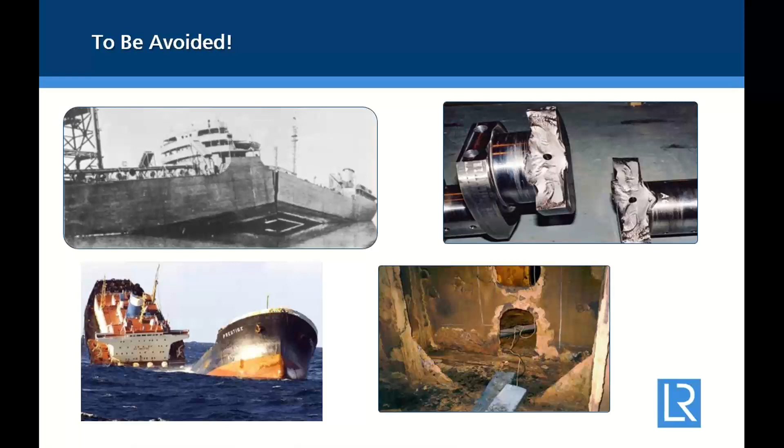Away from the home dock, you can see this collection of photos - they're not all directly casting related, but it does show you what can happen. So ships sink. It's a sad, unfortunate fact. Accidents happen. They may have human factors involved, but they may have mechanical factors. And we want to minimize, if not eliminate, the mechanical factors of failure relating to, or under which we can control the manufacturing process, to provide an approval system that's robust to give us safe ships and therefore safety of people.

So just a bit of history here. I appreciate you might enjoy that. I've even got a historic ship tie on tonight with some 17th century, 18th century ships on.

So Lloyd's Register was formed in 1760 and then it became a class society and has evolved over the centuries. It started off in a coffee shop. I wonder what the coffee was like at the time, but yeah, no cappuccinos, I assume.

But so quite a setup, very long standing, and now we have class societies around the world doing essentially the same job, which is basically to get these manufacturing approvals and other control systems to support the marine industry.

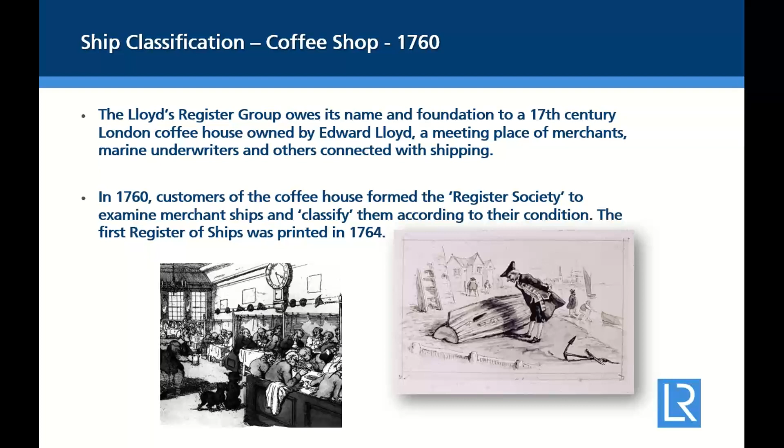So the Lloyd's Register is part of IACS, or it's sort of under the International Classification Society system. So we're one of the main members, and then we liaise and we implement IACS policy, and we contribute to the IACS sort of technical pool of knowledge, and then we discuss and develop rules and systems from them or under them or in conjunction with them and other class societies. So it's quite a complex system, but it has got a certain robustness about it, and this doesn't just cover castings.

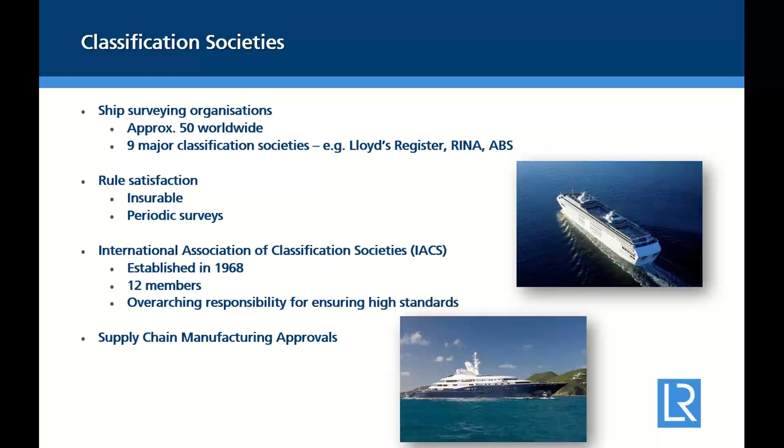It covers steel plates, forgings, pipes and tubes, proving establishments, a whole range of products. So I'm not going to list those other products because it's a bit beyond what we're going to discuss tonight.

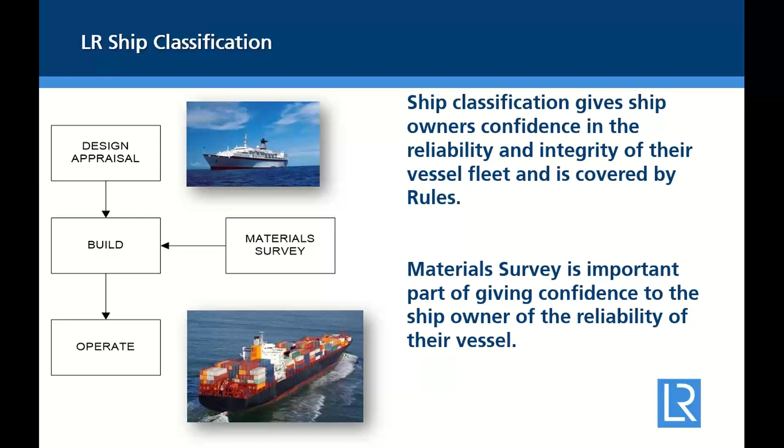So with ship classification, there is this sort of design appraisal, a build function, an operate function, but a critical part of that is what we call material survey, where we oversee the manufacture of the material and then into installation into the ships in the yard, and also for its maintenance thereafter. So this is just a sort of schematic of how that material survey system works.

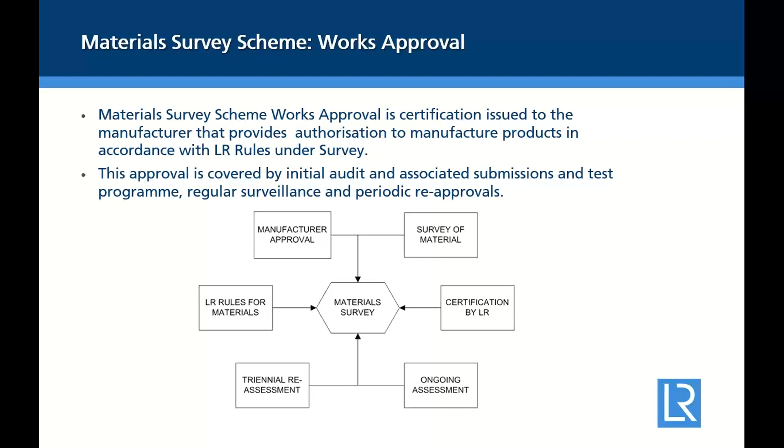So you've got a whole number of functions here. You've got the material survey of the material going into a foundry, also a forge, for instance, or a foundry. Then we've got the survey of the manufacturing process, and then we've got the certification by Lloyd's Register when that product is produced under our approval. And then we have a regular triennial reassessment, and then that needs to be sort of agreed every 3 years for you to continue to have your approval certificate. Again, I'm just throwing you diagrams at the moment - it gets a bit more interesting with photographs and see it in the context of tests and things.

So that says essentially what we've just gone through. We've got material survey, we've got manufacturer approval, we've got the rules - I'll explain that in a moment - and then we've got certification by Lloyd's Register.

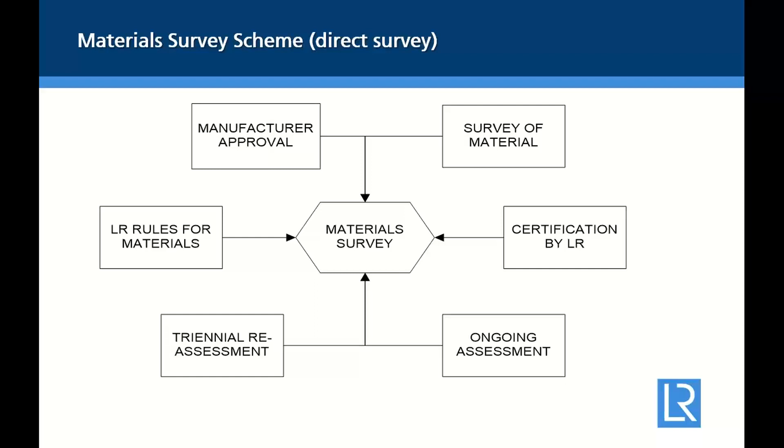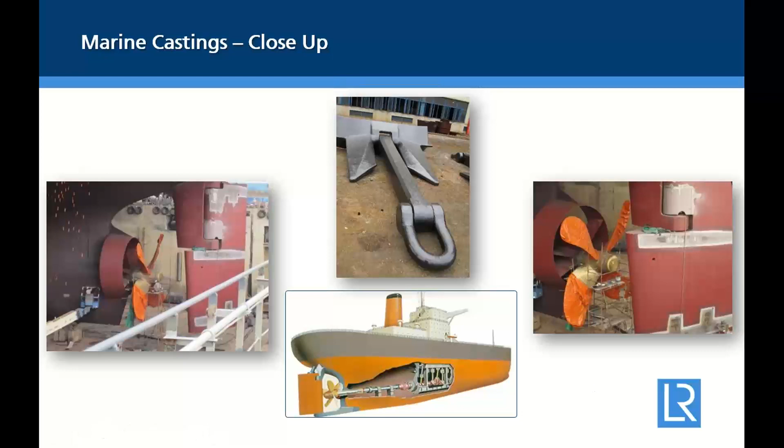So for an application, for an approval, we are looking for essentially 2 key factors. We need to know that the company is capable of manufacturing the part, can satisfactorily inspect it, and satisfactorily test it. And then we also want to know that the quality of the product is compliant with the Lloyd's Register materials rules, in association possibly with an international specification or a defence standard.

So if the material casting alloy is not in the rules, for instance if it's a nickel cast iron, then we would assess the approval to an international specification.

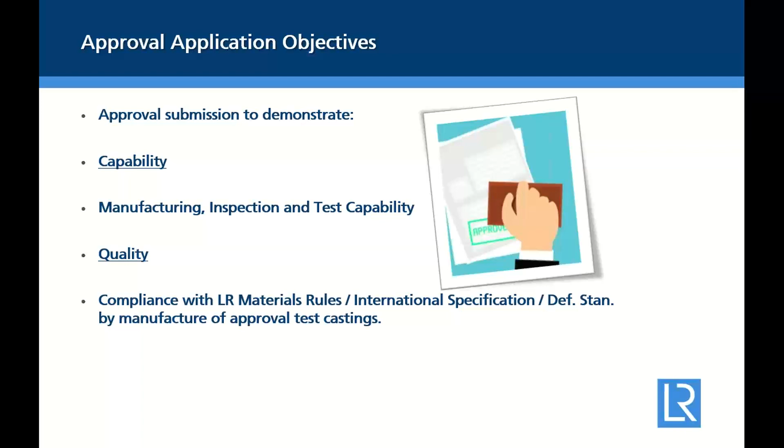Now, it's important to meet the surveyor. These surveyors are engaged throughout the supply chain, at the foundry end, at the shipbuilding end, at the steelworks, everywhere. And I commend these people, the men and women around the world - there's thousands of them - and they're very bright people, very well trained, and they do lots of materials courses because I happen to lecture on them.

But they do an important job, and they're no pushover in terms of material knowledge. They always consult when they have to, and they are heavily involved, and they visit the factory. So if you've got a factory in the UK, you will be visited by a Lloyd's Register surveyor at some point to help set up the approval, and then if that is set up successfully, they come and assess and look at the testing and certify the product or sign it off.

So men and women around the world going into factories and shipyards on a daily basis to keep an eye on the supply chain and then to certify products that are compliant with our quality standards.

So this is a book you can download for free. Now, a point I would make here is that Lloyd's Register Marine and Offshore as an entity is getting separated from LRQA, and that means all the websites are going to be split up, and so that's why I haven't given a specific web link for this book.

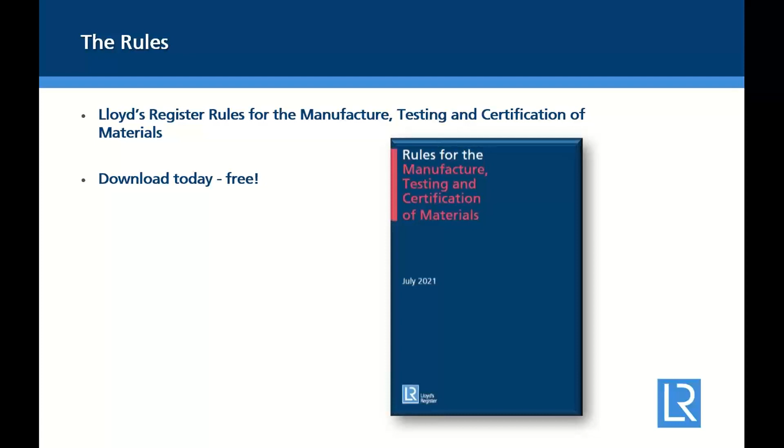It's free, you do not have to pay for it, and it makes a very good item to read on your Kindle or your electronic reader or your tablet. If you're stuck in a hotel and you've got nothing else to do, I commend it to the house.

So alongside the materials rules are another set of qualification documents, which are basically our guidance documents for specific approval groups or product groups. So we've got steel castings, steel forgings, aluminium plates, forgings and castings, and we've got copper alloys castings and iron castings, etc.

So again, you really need to put it into Google to get the latest web link. That's still under development to get these really latest versions. So again, that's why I haven't put a web link in, because the company is changing it by the day.

So again, if you go for a formal approval, you will need the materials rules that I just highlighted, and you will need the relevant document from what we call the materials and qualification procedures for ships. So let me just suck up some water here.

So we've got approval schemes for steel castings, iron castings, aluminium alloy castings, copper alloy propeller castings, copper alloys for valves, liners and bushes, and we have a few approvals for nickel alloy castings. Overall, we have about 3,000 metallurgical manufacturing approvals at any one time, and for casting we have about 880.

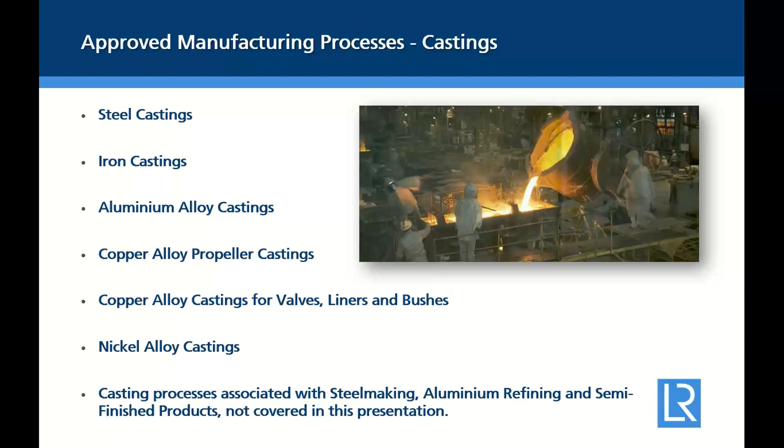In terms of casting approvals, there's about 880 worldwide, a few in the UK, not many. We've got cast iron, about 380 worldwide. Steel castings, about 360. Copper alloy valves, about 180 approvals. Copper alloy propellers, about 80. Aluminium castings, about 30 to 40 - not very many, but we get a routine turnover with those. And nickel alloy, we've just got a few. That seems to be developing, but not on the same scale as the other standard alloys we have.

For molding processes, there's no processes excluded. So we've got green sand, resin bonded sand - yes, I do appreciate what resin bonded sand smells like, same smell, different foundry possibly - and investment lost wax casting, either by robot or manual.

Centrifugal casting, we've got a few of those, particularly for copper alloy tubes, liners for ship applications. Die casting, and we've even got approvals that employ the Disamatic process. There's a few photographs I've taken in my travels, not the robot one, but it's always good to keep a camera with you when you visit factories, and they obviously agree for you taking the photograph.

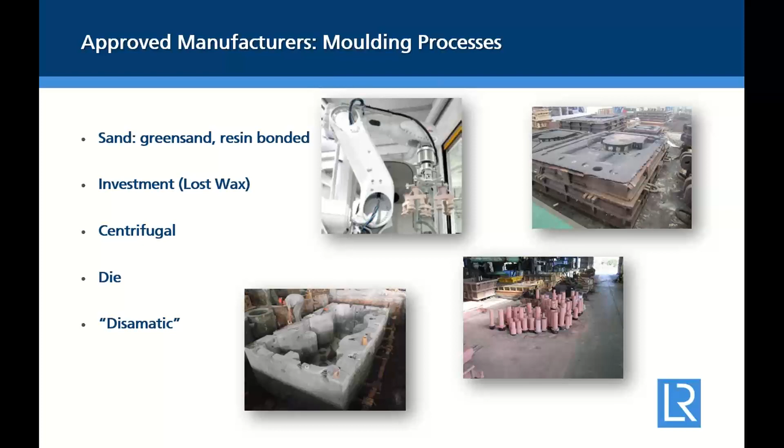Just to run through the steel casting alloys, we've got standards in the rules for carbon, manganese and austenitic. Certain alloys are not listed in the rules, and we can cover them under the approval scheme - we have to evaluate them to an international standard. So some martensitic stainless steel is not in the rules, and therefore we'd assess that to an international standard or a project-specific standard.

There's some other shots - we get up to maybe 400 tons for an approval application. So again, there's a large variety in weights, from a few kilograms for investment casting to several hundred tons for ingots for forgings possibly, that might be the application if it's that large.

The thing I want to emphasize is the running and feeding diagram here. If you're going to engage with us, you need to be open about how you calculate your runners and feeders, and for all the approval castings we will need to see the methods for. If it's a case of 'I'm sorry, we think that's commercially private,' well, we've got very discreet contracts with confidentiality clauses appropriate to this. So if you don't want to disclose it, don't want to discuss it even, don't want to show us, then there's not much of an option to proceed.

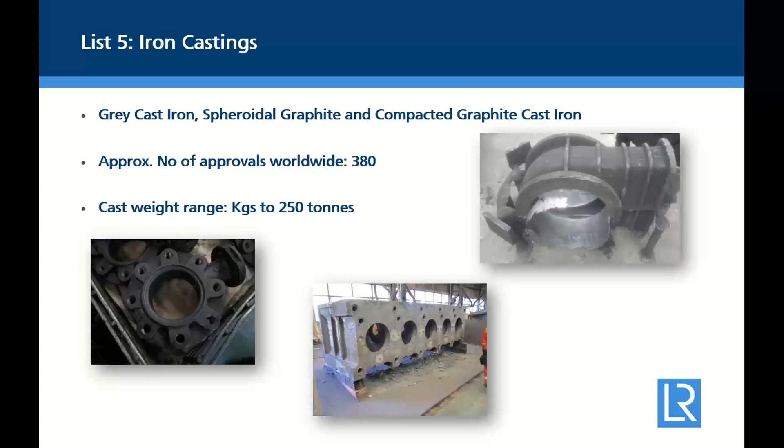Iron castings - there's a few views there. We've got grey cast iron, spheroidal graphite cast iron, and compacted graphite cast iron. Number of approvals, as I said, about 380, ranging kilograms to 250 tons sort of scale. Again, there's a few photos there just to give us a bit of context.

Aluminium, we've got up to about 500 kilograms, about 35-ish worldwide. The number at the top, the 6A, is like our own housekeeping number, our own internal list number, and it just helps us think about things. So you don't have to worry about the 6A or the 2 or the 5 or that - yeah, do not worry about that.

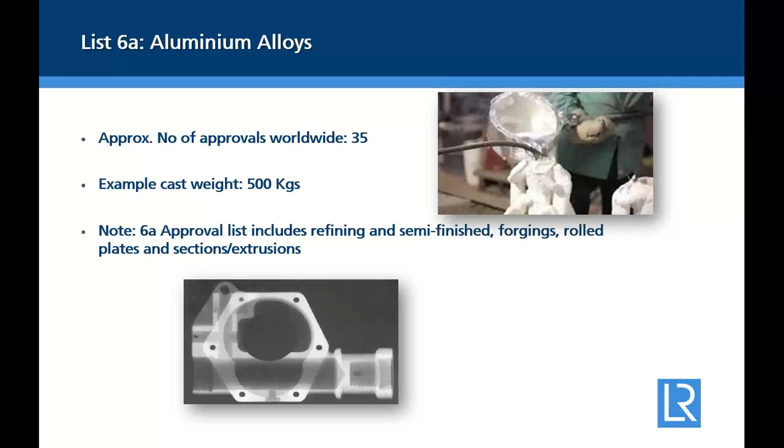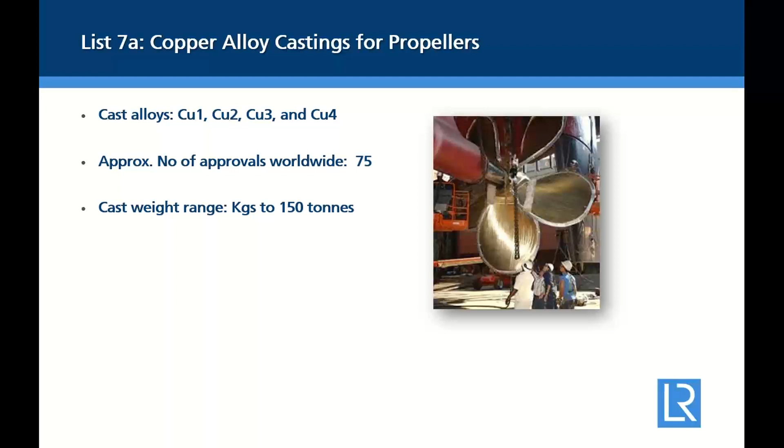Copper alloys for propellers, about 75 worldwide. There's an approval certificate currently with a maximum weight of 150 tons - obviously for quite a big ship, because some of these ships are 200,000 tons plus, big container ships that go around. They're getting bigger, and the applications are getting wider with gas ships - natural gas ships have been around the world, loads of stuff being refrigerated and moved. So things are moving at quite a quick rate, and of course we've got the new hydrogen - well, not new, but it's getting very popular at the moment, and we're seeing approval castings coming through, or approval applications, for that type of business.

Copper alloys for valves, liners, and bushes. So this can be valves, although liners - this is the tubes, bush components.

Again, we have up to 20 tons. There's quite a lot of approvals for small valves of about 100 to 150 kilograms. In fact, we're getting quite an increase in interest in approvals for investment casting for valve components in several different alloys.

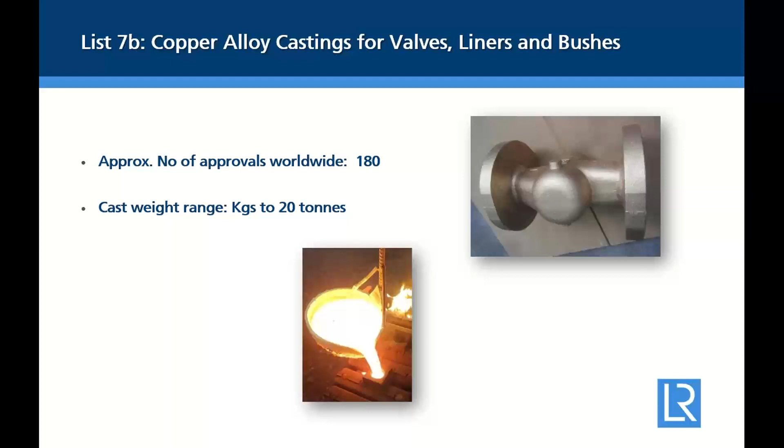So now I'm going to go on to how to get your approval. You have to engage with the class society, in this case Lloyd's Register, Marine and Offshore. They have local offices around the UK, in Liverpool particularly, and we've got a Glasgow office, with other subdivisions as well. Essentially you would liaise through the local office, which would be identified either through your online inquiry, or you may already be connected to one anyway.

There are 3 parts to this that are absolutely critical: the manufacturing capability review, the test plan of the approval test castings, and then we need a client to manufacture the approval test castings as per the test plan and the manufacturing information. Usually it's 3 castings per alloy. So if it's a grey cast iron, we want 3 castings. If you want SG castings or SG alloys as well, we want 3 spheroidal graphite cast iron castings as well.

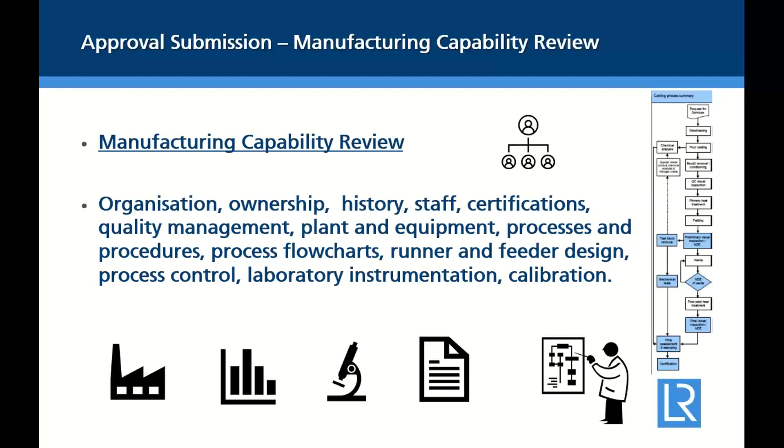So there's a few diagrams there. Sorry, there's a cat in the background that I'm worried about.

So the test plan - this is the absolute critical central pillar of the approval submission. It's got a few subtleties, and I'll go through this carefully, but none of it is too difficult that nobody gets it right. We've got 400 approvals on the books at the moment, each with a test plan - I've got 100 approvals on my books at the moment, each with a test plan. So it's important, and if it's not structured properly, then we have an argument, and we need you to redo it.

So you can save time and money by following our guidance, liaising if you've got any questions up front, and getting it right first time. The approval scope requirement is critical. This is a suggested structure: we need a list of the approved test castings, the approval casting alloy, the casting weight, and the delivery condition - that could be table 1. Then we need to know the rules or specification requirement that is relevant, i.e. the chemical composition and mechanical properties. You can insert this from the Lloyd's Register rules, an international standard, or your own project standard that you may wish to apply for a specific supply chain application.

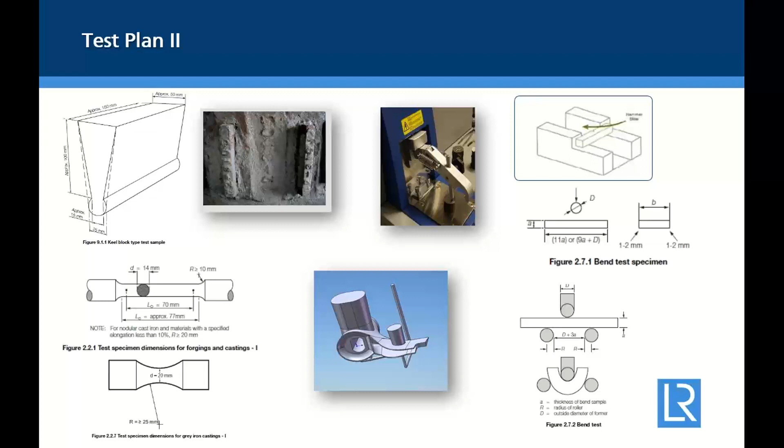So just another comment on weld repair - we need the procedure qualification record, the welder qualification, and the welding procedure specification. And you need to account for any specific welding clauses in our materials rules applicable to the alloy under approval, i.e. post-weld heat treatment for steel castings.

I've got some very good colleagues - I'm part of a small team, it's not just me doing this. Very skilled people, a team with decades of experience with this sort of thing, and we've got welding specialists as well, non-destructive evaluation specialists, and other metallurgists too, a wide variety of experience.

But I come back to the point that weld repair is important and it must be appropriately documented, if it's applicable to the approval. You need to tell us that clearly at the beginning.

So for non-destructive examination or evaluation, we need documents for this. We need a specific NDE procedure required for the approved product, and just saying that you inspect to an international standard isn't going to get anywhere. We need a specific NDE procedure that may reference or be based on an international standard, but it has to be relevant and applicable to the castings you're seeking approval for.

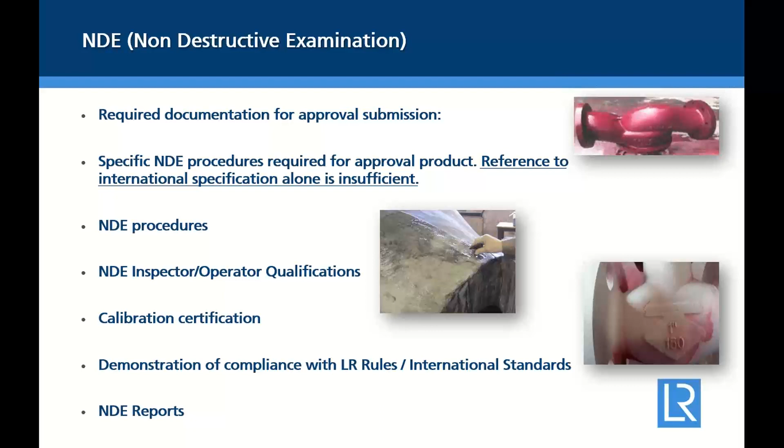So normally, if we were in the pub, I would say any questions, but I'll carry on. The third part of this tripod system for approval submissions is the test results. So you've done the manufacturing capability submission, given us your test plan which we've agreed, and gone away and manufactured the castings - molded, poured, fettled them - and I've been involved in all stages, so I'm very familiar with how dusty and hot it gets.

But the castings are there, and they have to be cut up and tested, or the separately cast samples are cut up and tested. Either way, we need a comprehensive submission of all the test results - don't miss anything out. We need all the test reports, the chemical analysis, mechanical testing, metallographic reports, corrosion tests, test graphs, heat treatment charts, NDE reports, and any photos. Photos are good. And we also need to know the weight, but you should appreciate that.

And then just some examples of odd photos from test reports. So we need everything, and we want it in a structured format. If it's unstructured and not labeled - not even that basic - then we're dealing with hundreds of these reports on an ongoing basis, maybe 400 at a time in the system. We've got 400 approvals at any one time. So this is a big operation, and we need our clients to cooperate with us to help you get your certificate at the end of the exercise.

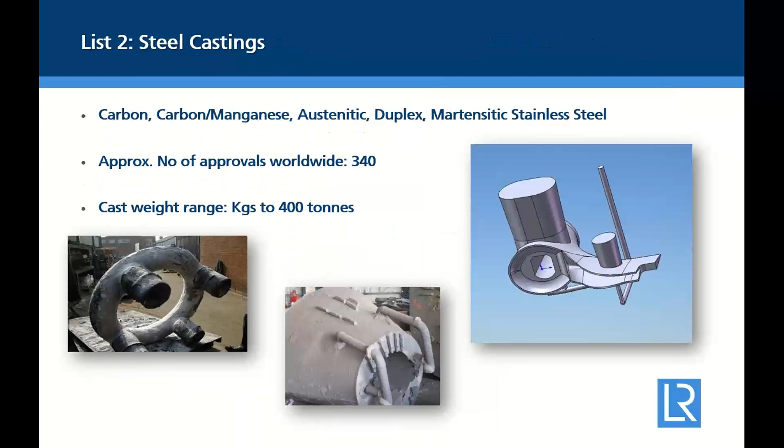So what it is - I'll just skim back. I want you to appreciate, I don't want to make you feel dizzy, but I just want to go through a couple of critical points. So for your approval submission, we need a manufacturing capability review, we need a test plan, and we need the manufacture of three approval test castings per alloy - that's per alloy group.

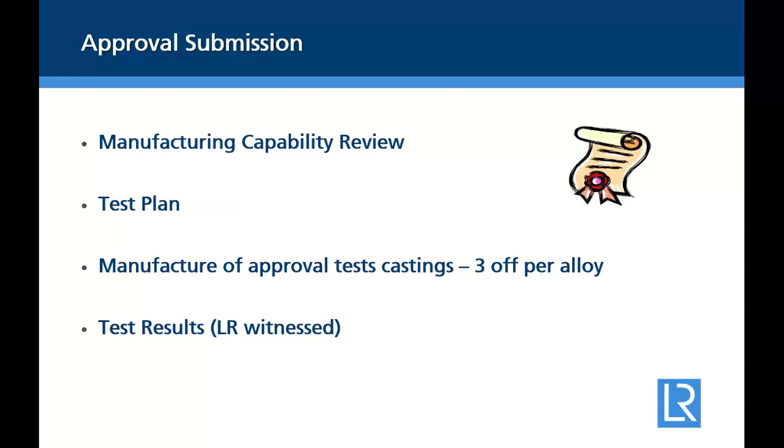So cast iron, SG iron are separate. Compacted graphite cast iron, separate. Carbon manganese steel, okay. Austenitic stainless steel - 3 separate castings please. And then we need the test results to be Lloyd's Register witnessed. So you're under a lot of scrutiny here, but what would you expect? We need to make these castings by a process that is robust, the qualification is robust, the assurance is robust, and therefore the ship doesn't sink.

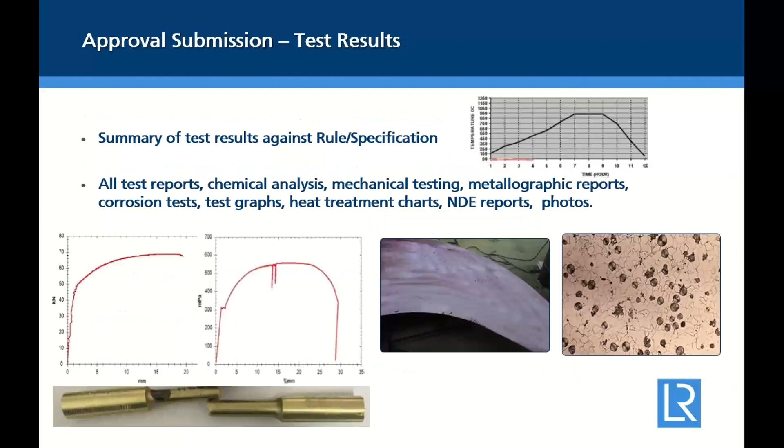So it's as basic as that. We want ships to be safe. We want the passengers to be safe. I sail to the Isle of Wight several times a month, and I'm on a ship or a catamaran, but obviously it hasn't sunk yet, and I'm very grateful for that. But it comes back to the safety of the platform. We make the ship safe, we make the people safe.

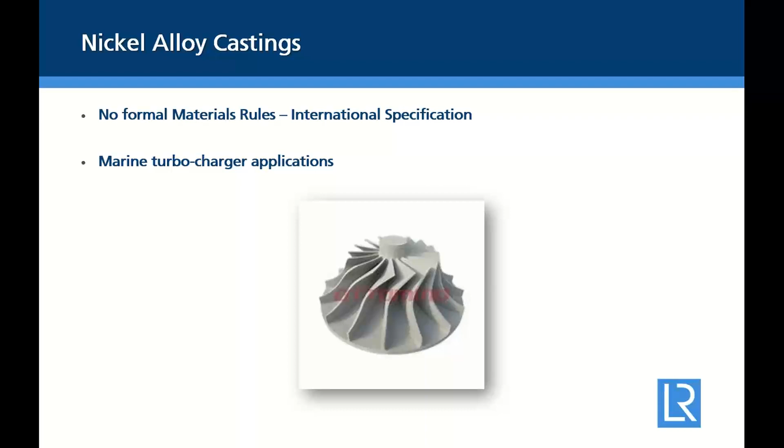Okay, just flicking over here. Look, so test plan - I go on and on about the test plan, but it saves a lot of hard work if you get it right the first time.

So we have lots of provisions to look at. When you go away, if you're going to do this seriously, please contact the local Lloyd's Register office. We are being restructured. I will say that the marine approvals are separate from the 9001 approval scheme.

Some companies get a bit confused between the two, even today. And the other reminder is, of course, LRQA and Marine and Offshore are separating. We will be two separate entities owned by two separate organisations.

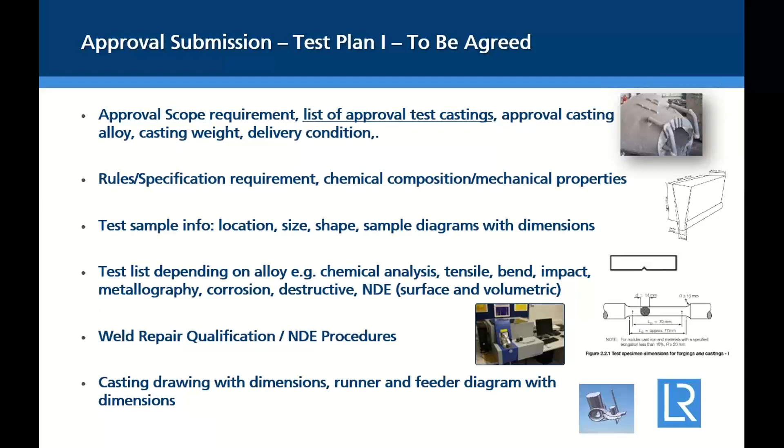Just another sort of feel-good item you may not know much about is that Lloyd's Register Marine and Offshore is owned by a foundation. This foundation is one of the largest charities in the UK, and it gets income from the Lloyd's Register companies, but then it donates funds to good causes, such as those that relate to the safety of people.

So it might be a PhD study, it may be an educational bus going around Turkey giving education to school kids. There's a lot of good causes that the business supports, because there's no shareholder making a profit. Now, I'm not criticizing companies that make a profit, because that's where our pension funds are invested, and we all like them. But in this case, we have sort of an ethos of serving this foundation.

Recently I've been mentoring a PhD funded by the Lloyd's Register Foundation. The person was funded to investigate a technical subject - in this case, it was cold metal spraying, which can be used for repairing castings. That's another talk for another day.

So I commend it to the House. Any questions?

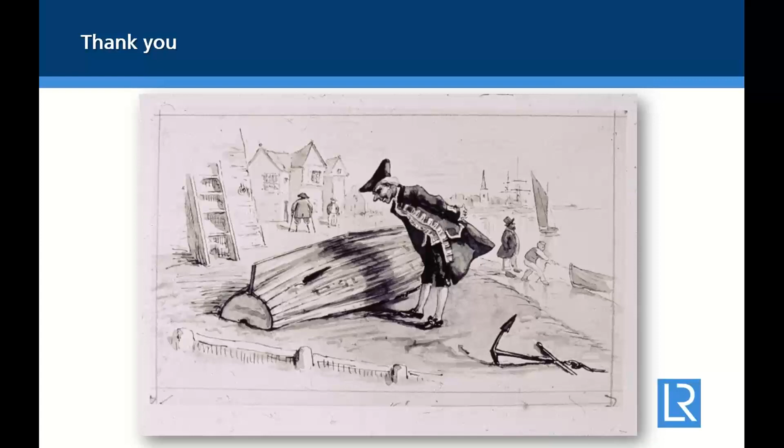If you've got a technical inquiry that you're kicking off, as much information as possible is good - you can't give us too much information. Like the castings, what do you want to do? What's the supply chain? What are they feeding into? Are they part of a greater supply chain assurance exercise? We need to know that. You don't have to tell us if they're going to be approved by another class society, but a lot of approvals are multiple class society at the same time.

So yeah, we welcome your inquiry. As I said, I have to direct it, I can't answer it myself. I can give you the odd word, but I have to go - well, it's quite appropriate to go for our local office, wherever you are. That's great. Thank you very much, Clive.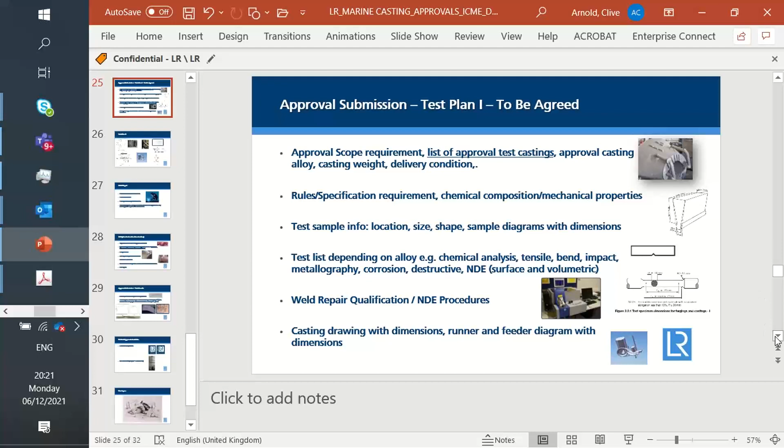Well, good point. Let me just, if I may, go back to the NDE page. Let's expand that one. So non-destructive testing, who is it? You produce a casting and you're responsible for the delivery of that product, but you're not responsible for the NDE of it.

I'll put that as a question. So if you use a subcontractor for non-destructive evaluation, which you're entitled to do, there's no argument about that, but you still have to submit, you still have to be aware of what those procedures are. You need to give us those procedures and their NDE qualifications, and we will comment on them and review them appropriately. So if you're subcontracting any operation - if you subcontracted the casting, well, I'd have something to say about that. Is that really under control? Is that really appropriate - making the molds on one site and transferring 100 miles to cast on another? Probably not very efficient, we probably wouldn't be too keen on that. In terms of subcontract NDE, that's perfectly reasonable, provided you give us the procedures and you give us the results.

And as part of the inspection, if it's at a premises pretty close by your foundry, then it's appropriate for our surveyor to maybe go and view that, and/or witness the testing. Or if it's anywhere else in the UK for that matter, it's for the surveyor to be engaged, to be aware of when the NDE is being undertaken, so he can go and witness and then countersign the certificate or the report. Does that answer the question?